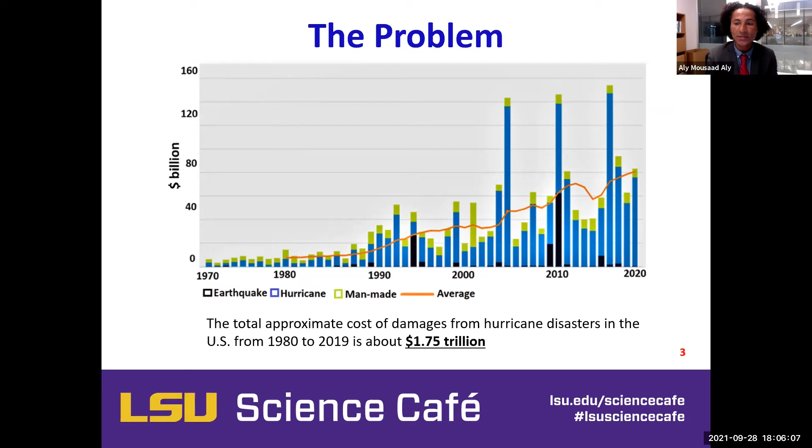Next, please. And usually the losses are in terms of flood, wind damage, and other things. So recently, Hurricane Ida brought damage to Louisiana, and that was in a form of flood and damage to the infrastructure. So absolutely, to avoid damage to these buildings, we need to have a good understanding about how they interact with wind to avoid wind damage.

Same story with Hurricane Irma. And Hurricane Michael, which hit Tyndall Air Force Base, damaged residential buildings, and other types of infrastructure.

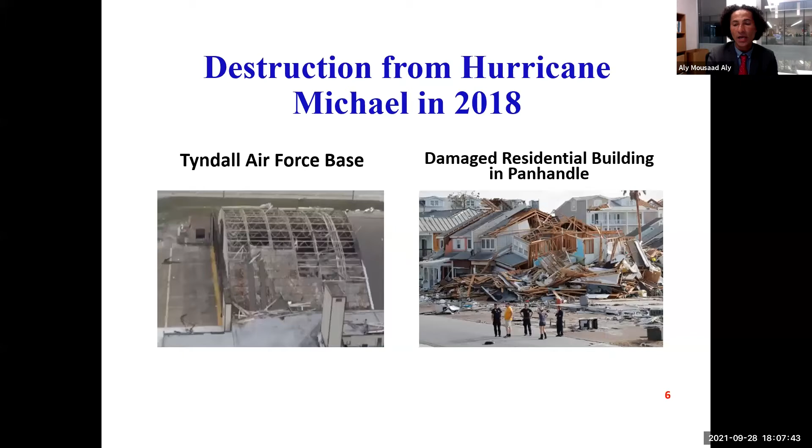This has been a history, not just recently. Of course, recently with climate change, there is an increase in the intensity and number of hurricanes and windstorms. But since 1992, when Hurricane Andrew hit Florida, there was development over the years for stronger building codes and standards, but we still can see the damage up to date.

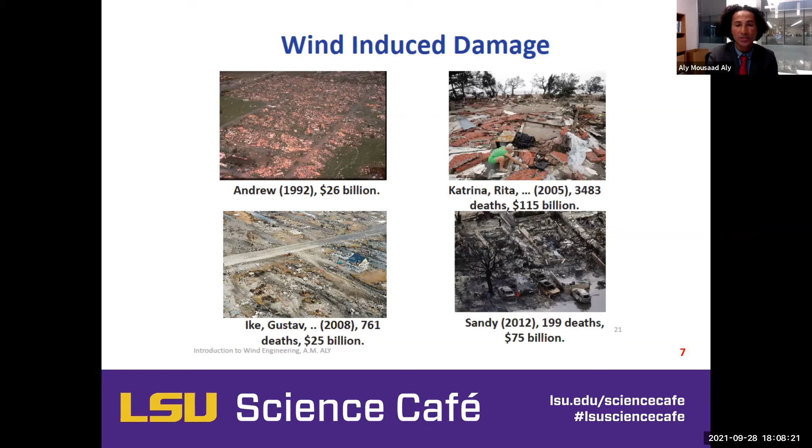So if we think of a residential home, low-rise buildings, mostly the damage will start from the roof. Why is that? It is because these types of infrastructure are bluff bodies compared to streamlined shapes, like, for example, the airplane wing. This will lead to flow separation, and the flow separation will cause uplift forces that cause the damage to the building. Usually the damage starts from the roof.

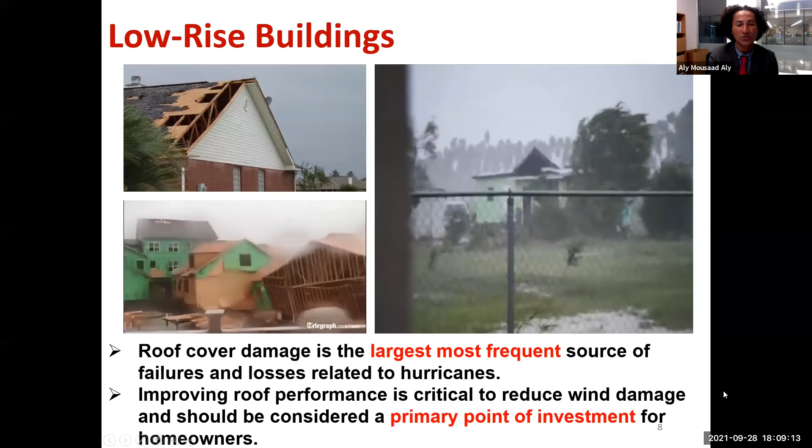But the lower bottom one is an unusual case where there was base isolation to protect the building against earthquake, so it made the whole thing softer, but this is not very common.

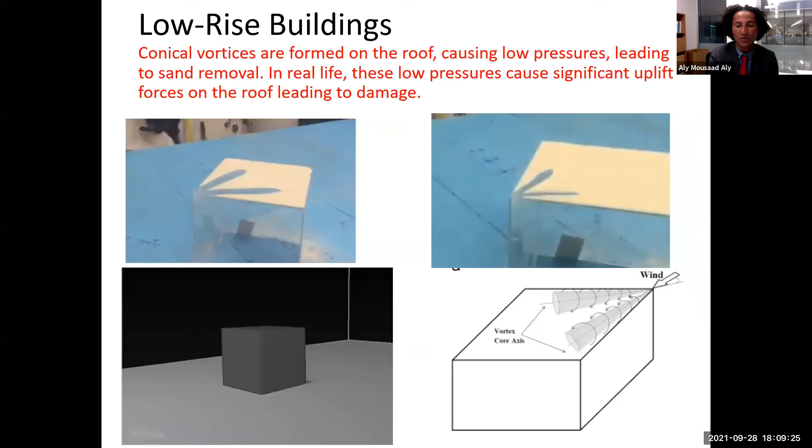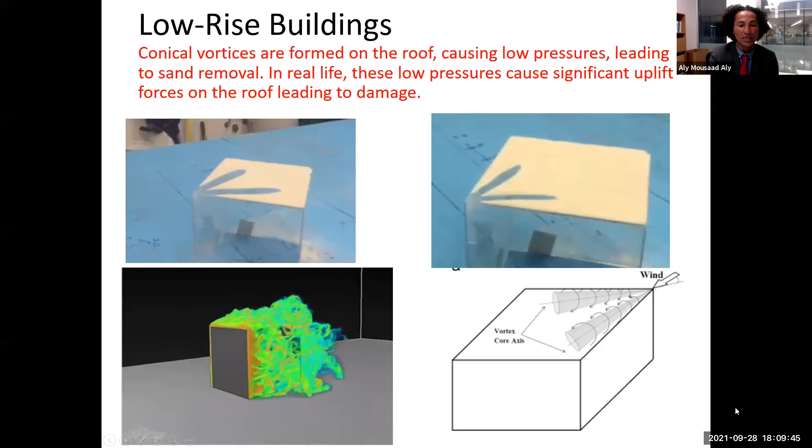As I mentioned, because being bluff bodies, the flow will separate and create uplift forces. If you click on the lower left corner, the cube down there, this is a visualization of what is happening. In fluid mechanics, this is a flow separation that creates negative pressures. Think of a giant vacuum cleaner or something that uplifts the whole roof.

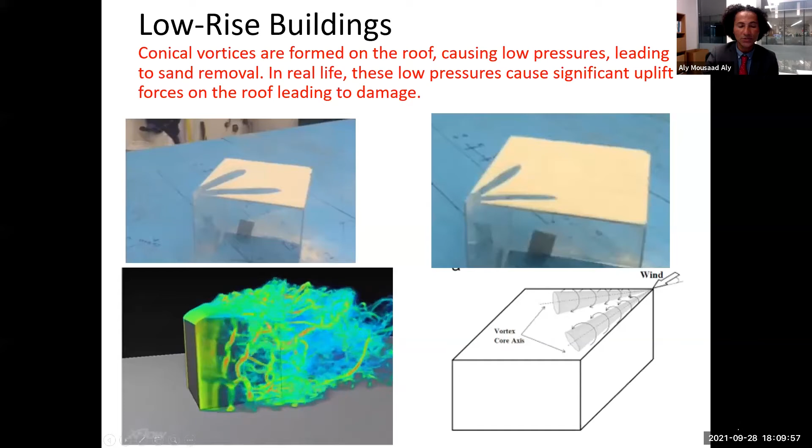So where is wind engineering from this? Well, wind engineering deals with the interactions between the wind in the atmospheric boundary layer and almost everything on Earth.

To build more resilient infrastructure, we need first to model the wind, and this can be done by modeling the wind in something like wind tunnels or open jet, or even computationally in computational fluid dynamics. There is interaction with the built environment, which can be anything on the surface of the Earth.

Why do we do that? Because there is damage and there is inconvenience, like the flow around high-rise buildings causing discomfort. But there are also benefits. Wind is not always destructive. Moderate wind can be used to generate electricity through wind turbines, for pollution dispersion, and also it is useful for natural ventilation and things like the heat island effect in cities.

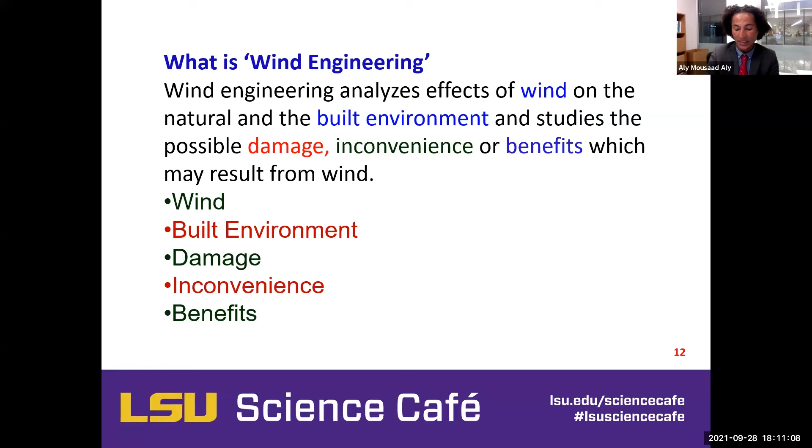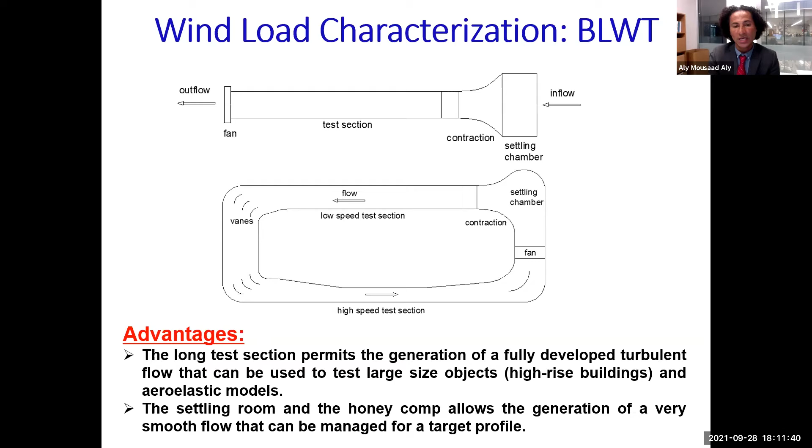So in order to do that, researchers have been relying on wind tunnels since about 1960 up to now. A wind tunnel has a test section, wall bounded, and we create a flow of air in it. Then we put roughness elements in it to try to produce turbulence, because wind at full scale has a unique type of turbulence.

So as we can see here, this is what is inside a wind tunnel. We have a building scaled, and the scale here is the geometric scale, 1 to 100, being tested in a wind tunnel. We can see things like spires and roughness elements, and these are to create turbulence. This has been very useful over the years. Thanks to wind tunnels, we have seen lots of high-rise buildings and towers successfully designed.

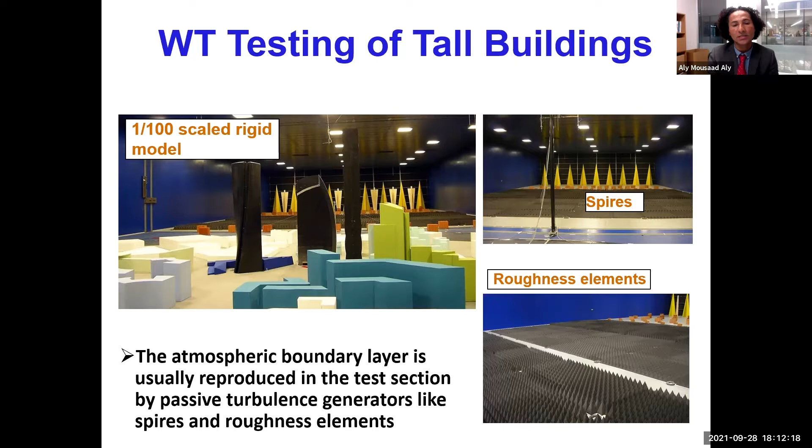The issue became more evident when we want to test things that are smaller in size in the atmospheric boundary layer, things like green energy infrastructure, even residential homes. The number before was 1 to 100, in one of the largest wind tunnels. At 1 to 100 scale, if the building is 200 meters height at full scale, it becomes 2 meters in the lab. But what if we use the same scale for something like a solar panel, which is 100 by 200-300 centimeters or so, then the size becomes really small, like 1 centimeter by 2-3 centimeters.

Then it becomes very challenging to test by the traditional wind tunnel. This is because the flow in this type of wind lab is scaled in a way that the integral length scale of turbulence is 1 to 100, or 1 to 300. So there is huge uncertainty in this case of testing, and the turbulence physics are not the same. Add to that, the Reynolds numbers are not matching with what we have at full scale. So this is one of the biggest challenges that we have with wind tunnel testing.

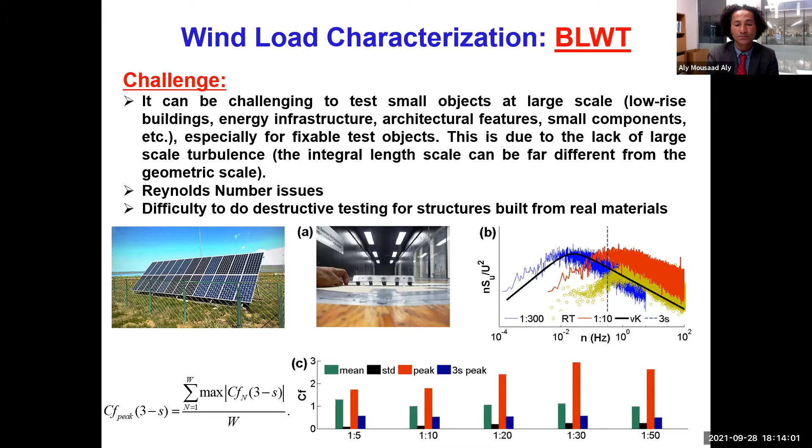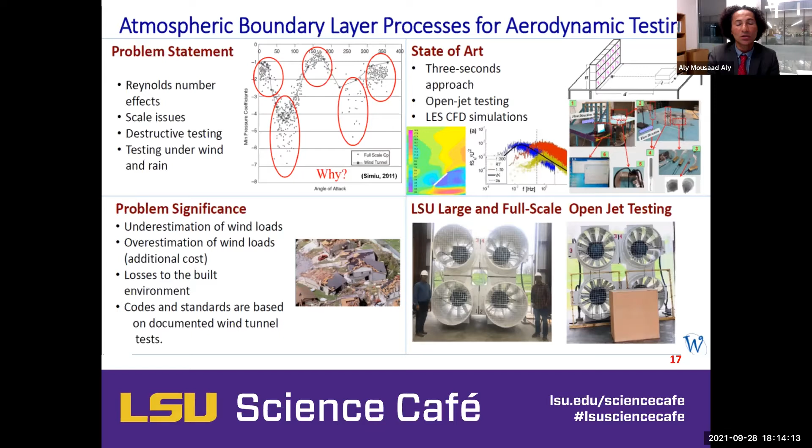So with Open Jet, we can overcome these issues by testing at a higher Reynolds number and reproducing larger scale turbulence.

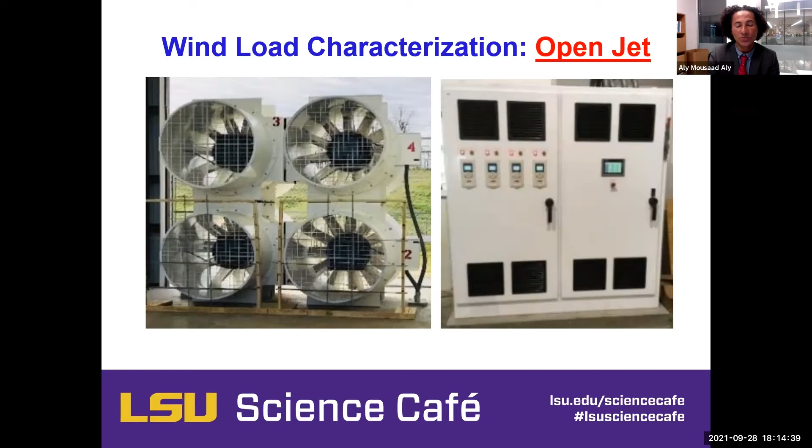So this is the Open Jet facility, and it can produce a flow where each engine here is about 800 horsepower, so the flow we can produce can be at high speed. Also, because we don't have walls immediately surrounding the high-speed flow, the walls are located at a further distance, and that gives us a chance to create more turbulence than what we have in what I call wall-bounded wind tunnels.

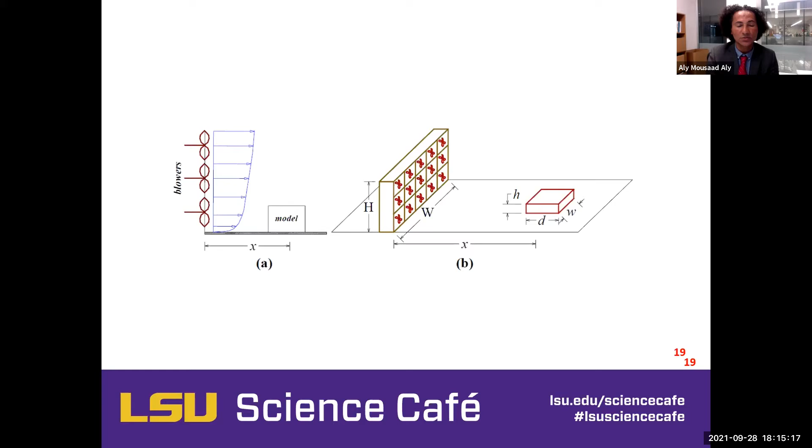So the concept is explained here, and we have a test model that should be located at a certain distance and with a certain size. To show an example of this, next please.

So it was the cladding for high-rise buildings, a study motivated by the failure of the glass and the cladding, for example windows of the Capital One tower after Hurricane Laura in Lake Charles, 2020. We wanted to understand why this is happening. Before that, we saw that wind tunnels are good at predicting pressures for high-rise buildings, but it seems like there is still a gap.

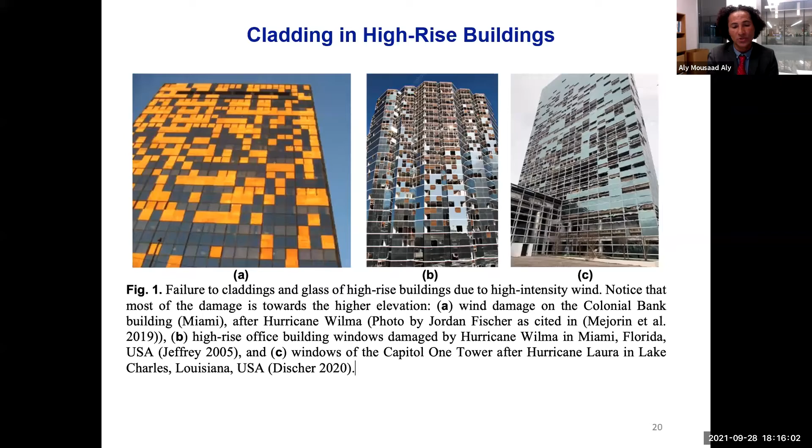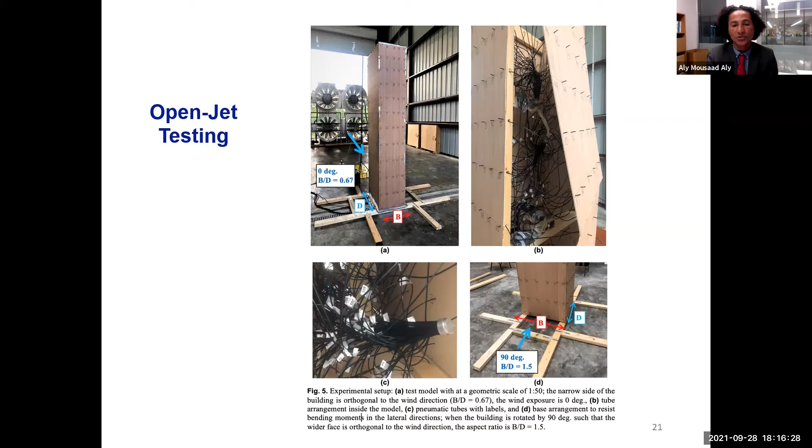So we brought this high-rise building to the lab at a scale of 1 to 50, and we tested, as we can see here, this is the building, and from inside we have about 256 pressure taps connected to high frequency pressure transducers to acquire pressures on the surface.

And here is what we got, if we look at these peak loads. Subfigure A is the windward facing side of the building, and as we can see, we got pressure in the order of 2.5. These are pressure coefficients, but in the corresponding wind tunnel they are lower. They are even much lower on the side wall, we got a coefficient in the order of -4, I'm talking here about the magnitude or absolute value. But in the wind tunnel, around the same higher location, we have things around 2.3, 2.2. So it's almost like twice.

So we have higher loads compared to what was predicted in a wind tunnel.

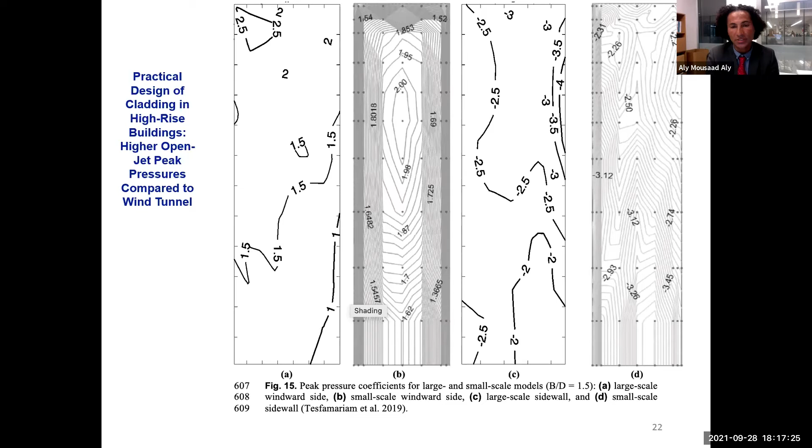So this is another case study, where these are trees for a project in Italy they call a vertical forest, where we have trees on the balconies like this, and we wanted to make sure they will be safe and secure under wind. So we tested things at full scale from the tree itself without any modeling, because if we were to do this in a wall-bounded wind tunnel, we would need to scale it down, and then the tree would not be the true material.

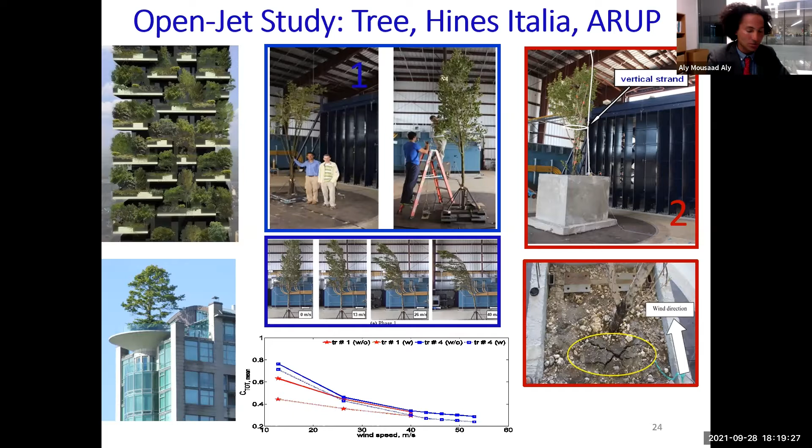So we were able to predict the physics at full scale, which is that trees under high speed tend to bend, and the shape tends to be reduced, leading to lower forces than if we were to predict it in a wall-bounded wind tunnel. Of course, the tree has to be healthy here in order to change shape with the increase in wind speed.

We did also vibration mitigation in traffic lighting support structures, and these types of structures are also subject to damage due to wind.

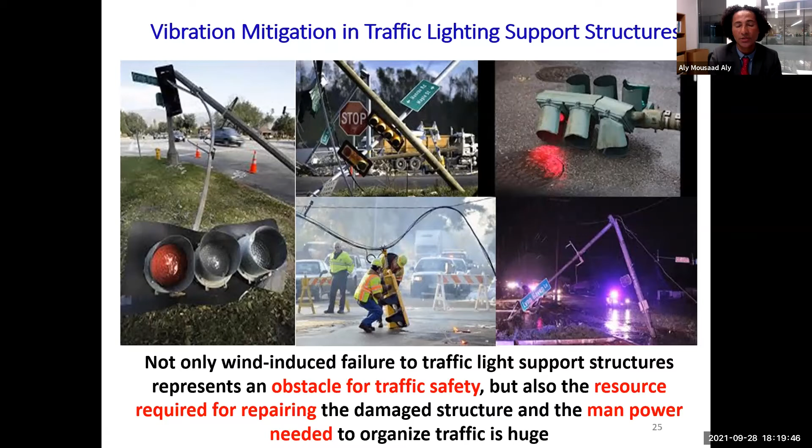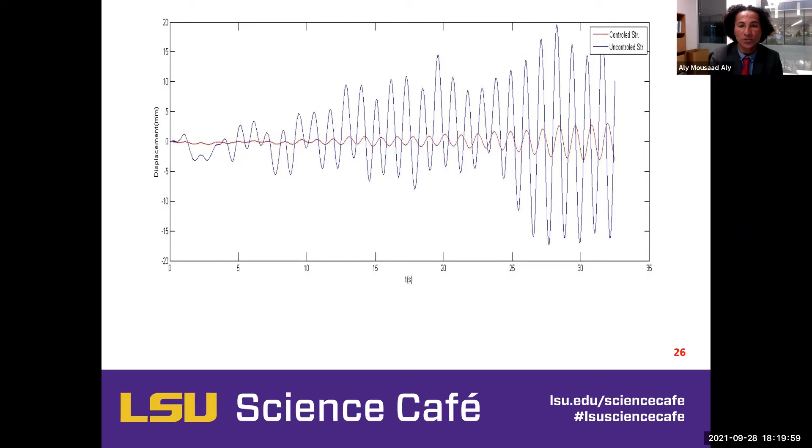And as we can see here, we tuned the lighting boxes to act like tuned mass dampers or energy absorbers to reduce vibration, and that worked effectively.

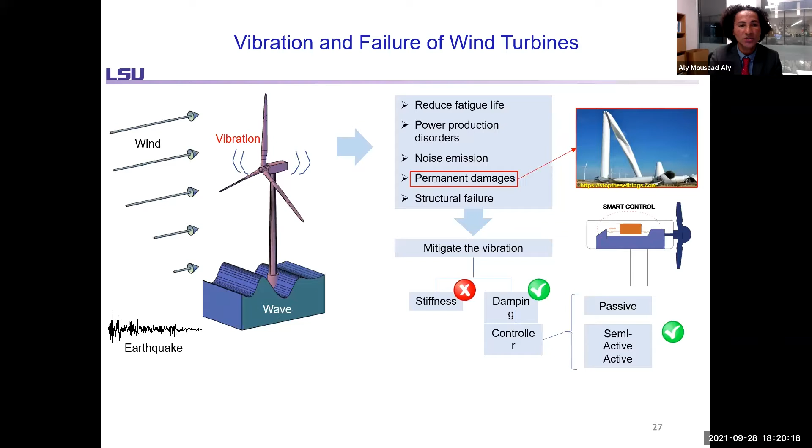Also for wind turbines, they could be subject to damage due to wind. If they are offshore, then it is wave, and if it is a seismic zone, then they are also subject to damage due to earthquake. And here is the kind of damage that we have.

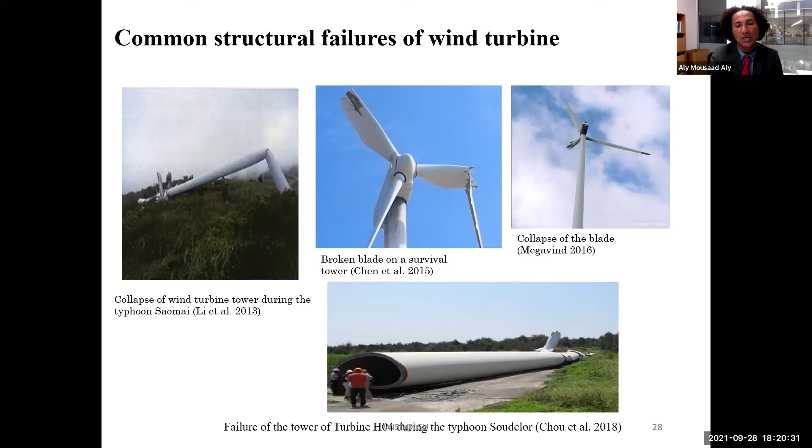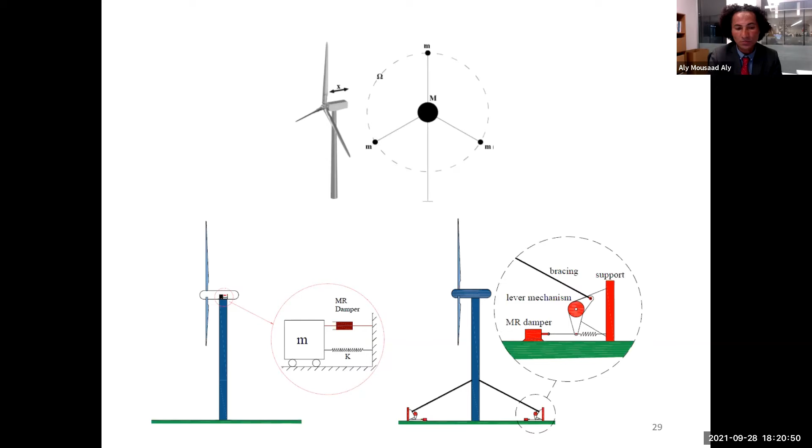Of course, what happened to the tower can be prevented by vibration control. So we modeled the wind turbine under the action of wind, wave, and earthquake, and we proposed a semi-active control system, and the approach worked very well.

And we expect this not only to reduce vibration and protect the tower and the structure, but also to increase wind turbine availability, because if there is vibration, even without damage, we cannot just extract the energy.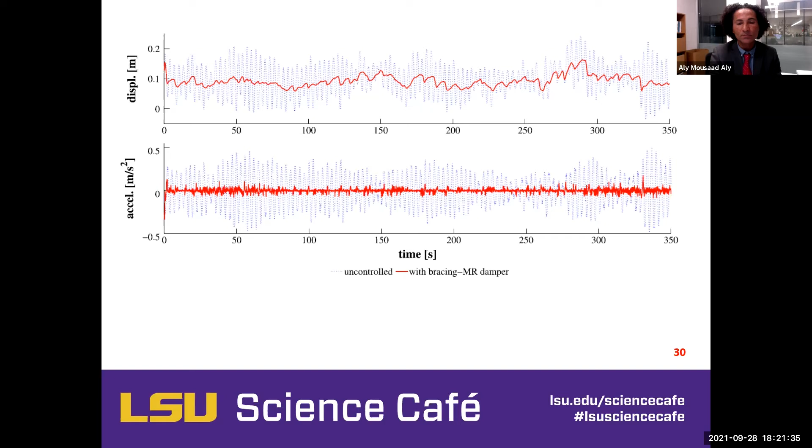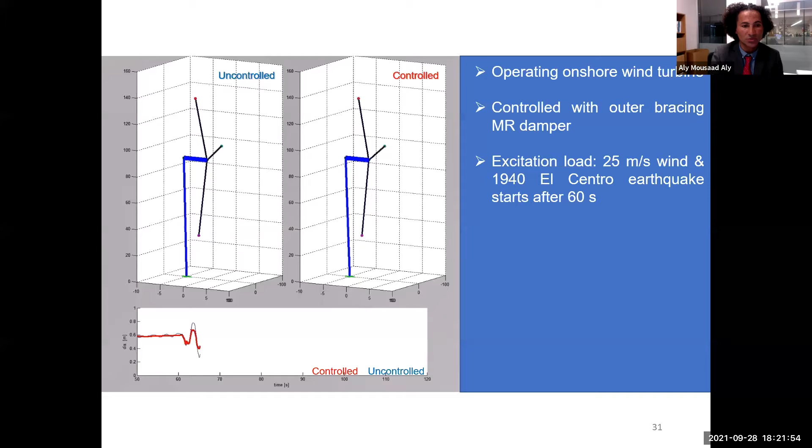If you click on the figure down there, it just shows the uncontrolled and controlled case. The one on the left is uncontrolled, so large amplitudes, and the one on the right is controlled with much smaller amplitudes.

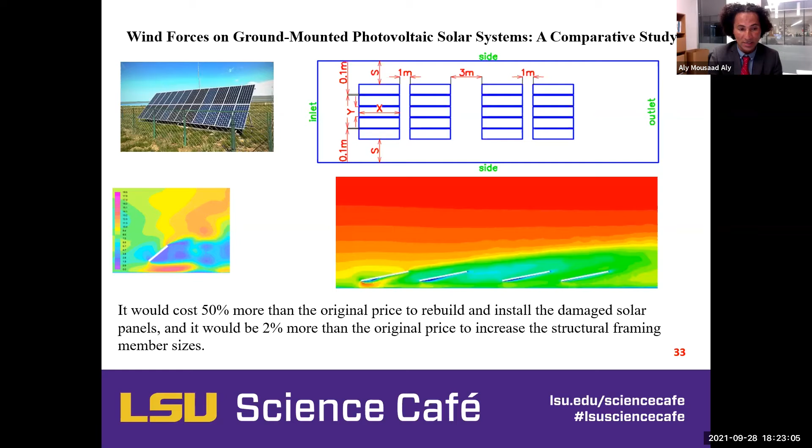So we did a CFD study looking at panels in the array, and we figured that if the original design was reinforced by increasing the price of this solar farm just 2%, it would have prevented damage in the order of 50% of the whole solar farm.

So this is what we are trying to do. In order to achieve a resilient economy and uninterrupted businesses, we really need resilient and recoverable infrastructure. And while we are doing this, there is a lot of educational activity from K-12 to the graduate level, as well as outreach activity.

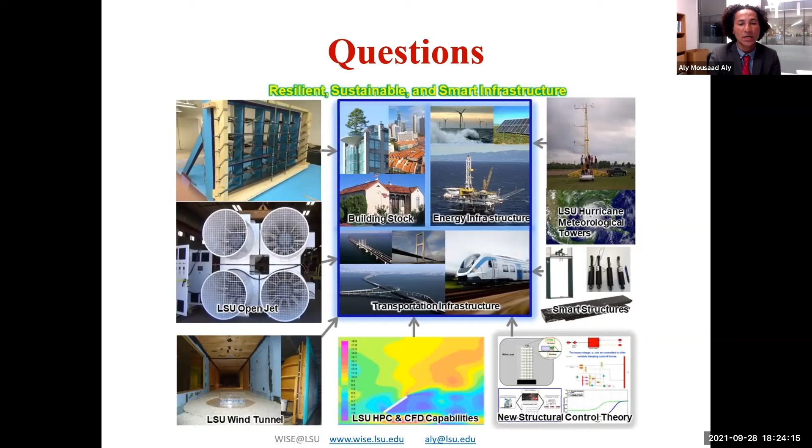Our interest in wind engineering is always related to what is happening to building stock, low-rise and high-rise buildings, energy infrastructure, transportation infrastructure, and almost everything on Earth. How can we build them to be more resilient, sustainable, smart, and economic, and reduce the consequences of failure. With this, I end my presentation, and any questions, please.

Dr. Aly, that's some really fabulous work. There's so many questions that come to mind. We have a couple already in the queue, but before that, I wanted to ask a straightforward question: how did you become interested in wind engineering specifically? It certainly seems here in Louisiana to be a really critical area of study, but I find it interesting how people get attracted to certain areas of research, and I think our audience would like to know that as well.

Well, that's a little difficult question, because I seem like I live with the wind. So when did that start? Maybe a long time ago. My interest came to my mind just after my master's degree when I did things for vibration control in buildings under earthquakes. And then the question was, is this going to work also for wind, like multi-hazard things?

And I traveled to Italy, Polytechnic University of Milan, and there I found a lot of projects. Wind is just more than the dynamics for buildings and how to protect them. There are other things, bridges, low-rise buildings, and all kinds of infrastructure on Earth. So I became more interested and challenged by it.